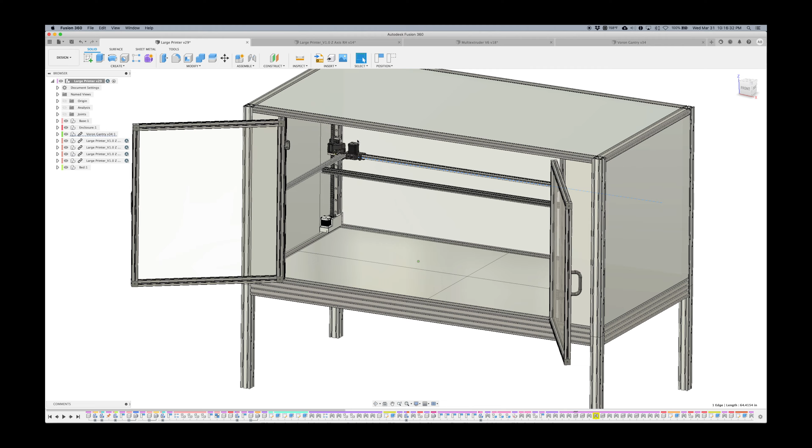So here's the entire machine, built out of 80/20. The doors are salvaged off of some industrial equipment.

The whole thing, these panels are all 1-inch high-density polystyrene foam, which is aluminum faced. You get it at Home Depot or Lowe's, the home improvement stores. And that's on the left and right side, the back, the top, and there'll be one underneath the bed as well to insulate the entire machine.

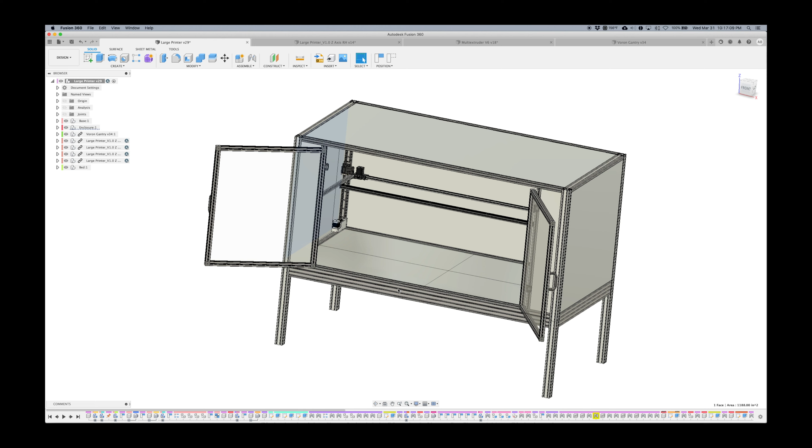So the bed is made up of 4 MIC-6 cast aluminum tool plates. They're 1/4 of an inch thick, and each section of the bed has 2 400 millimeter square silicone heating mats.

So I went with this design versus something different, such as a single mat or 2 larger mats, mostly for servicing the machine. If I have a mat die, like this one per se, I want to be able to just replace this panel.

So in theory, you could pull this 1 quadrant heater out, put a new one in, service this one offline, and keep it as a spare.

Whereas I had got prices for 900 millimeter square heaters, 2 of them, but the risk was just too high for me. If one failed, you could be down for weeks while waiting for another heater, plus you have to delaminate that heater from the bed, relaminate the new one, all kinds of trouble there. So this made the most sense in my mind.

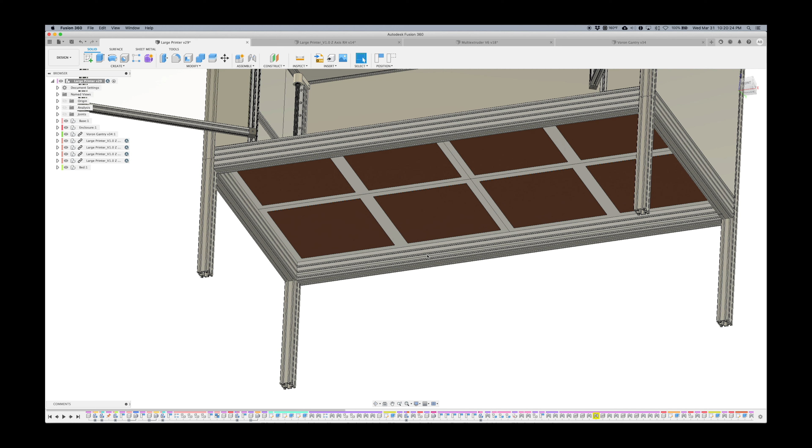So this will be insulated as well underneath the heaters, and not shown, there is 3 crossbars that are 2 inches square supporting the heaters, as well as some more supports on the edges supporting the edges of the plates.

So on top of the plate there is a 1/4 inch sheet of tempered glass. This was very reasonably priced in my opinion. I got a price of a little less than $200, custom cut, edges smooth, corners rounded, and brought into the local glass company, and then for a small fee they'll deliver this to my house, and I might be able to even get them to put it right in the machine.

But I figured for $20-30 to have them delivered to the house was a lot better than risking damaging the plate, transporting it in the pickup truck, since I don't have the equipment to transport glass like they do.

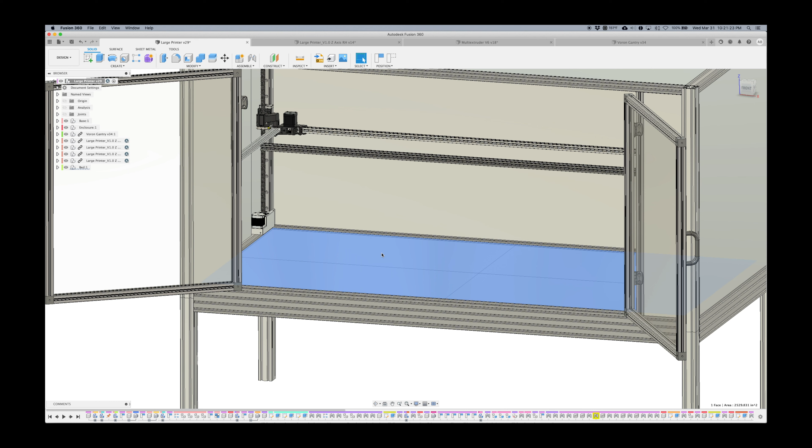So that's the structure of the bed. We'll move up from there now.

So the doors are polycarbonate, or Lexan. I have these, they're not going to be the most insulated. I will most likely look into adding a second layer of polycarbonate to create an airspace later on, so I don't stress the heaters too much.

I do have a 2400 watt resistive heater fan coil unit that I'll be using to heat the chamber. That'll also be modulated through a solid state relay.

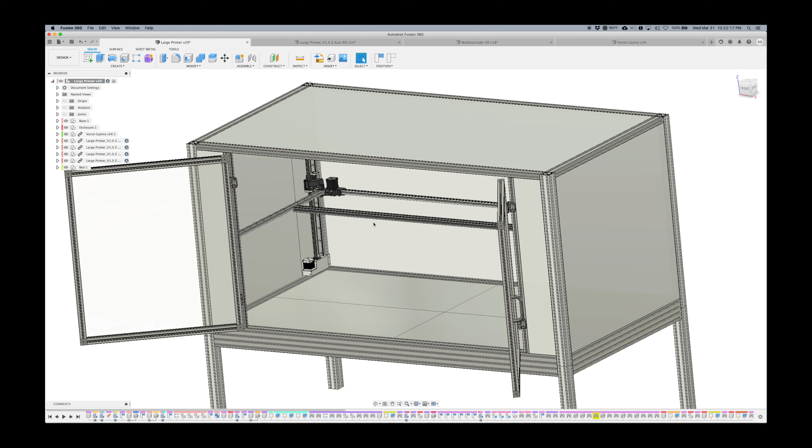So let's turn off the enclosure so you can see the workings of the machine. You'll notice I'm supporting it on 4 screws.

So these are 1605 ball screws. The price was right on these, that's why I went with these. I would have liked to go with 1604s, but I just could not get them. And I would have gone with 1204 ball screws, but also couldn't get them in the length I wanted.

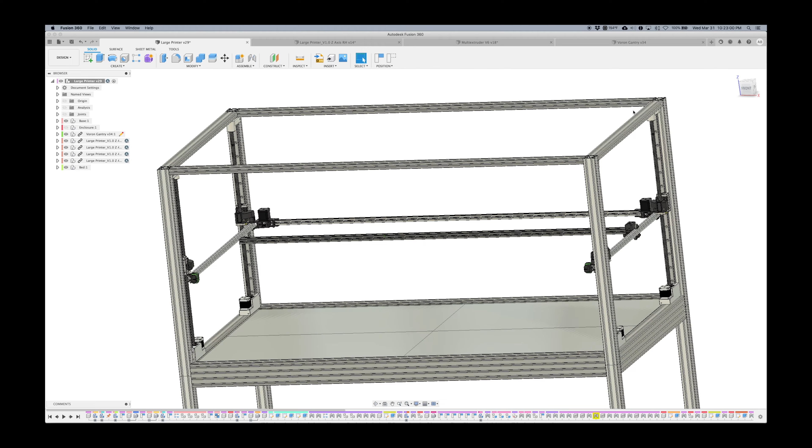So while I have the capability of machining all these parts custom, I didn't want to. I didn't want to waste all the time building a machine when I really just wanted a printer. So some compromises. There's a lot of concerns out there that these screws are not the straightest screw.

So I did some tests. I tested 2 out of the 4 screws that I bought. They all came at the same time from the same distributor. I put them on a known flat surface, and I checked them with an indicator with the ball nut at the center of the screw, and I was getting about 1.5 thousandths of run out on the center of the screw to the nut. So in my mind, that was good enough for me.

Like I said before, I'm not building a printer that is for crazy high accuracy. It is for putting down a lot of material in very large layer widths that shouldn't matter if the screw wobbles a few thousandths of an inch.

So there's a few things here that aren't drawn yet because I don't exactly know how they're going to work, and I'm going to have to figure them out on the fly. But for the most part, this is the printer. So 4 screws, we have stepper motors. We'll jump into the model for them.

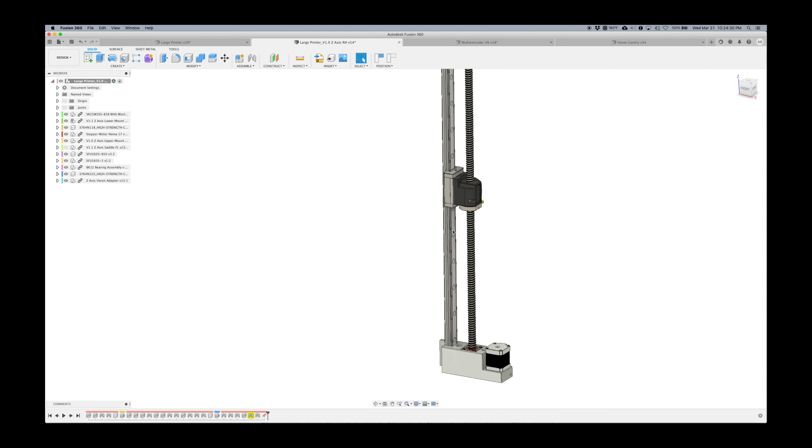So these are basically all the same. We have a 25 millimeter dual profile THK linear rail. This is something I've salvaged from some machinery over the years. I actually have 3 sections of rail. One of them is long enough to get 2 out of, and the other 2 are long enough to get 1 apiece out of. So these are cut at 33 inches roughly in length.

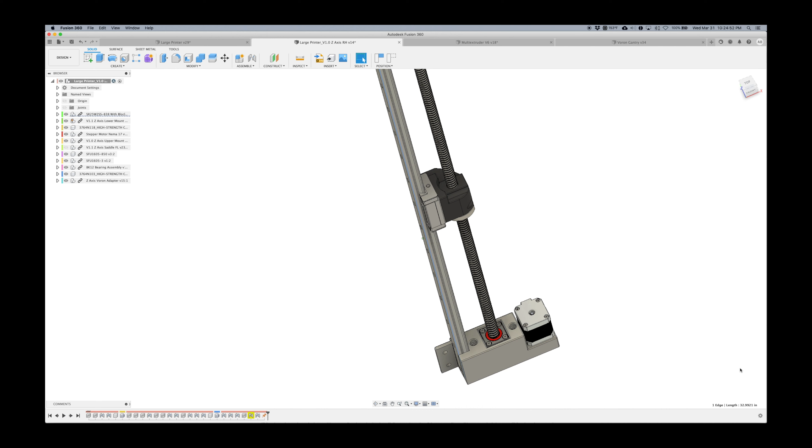And then I've designed these upper bearing supports in these lower brackets, and these reuse the bearings that come with the screws. So it was actually cheaper to buy the ball screws with the end bearings and just reuse the pieces out of it than it was to try to do something else.

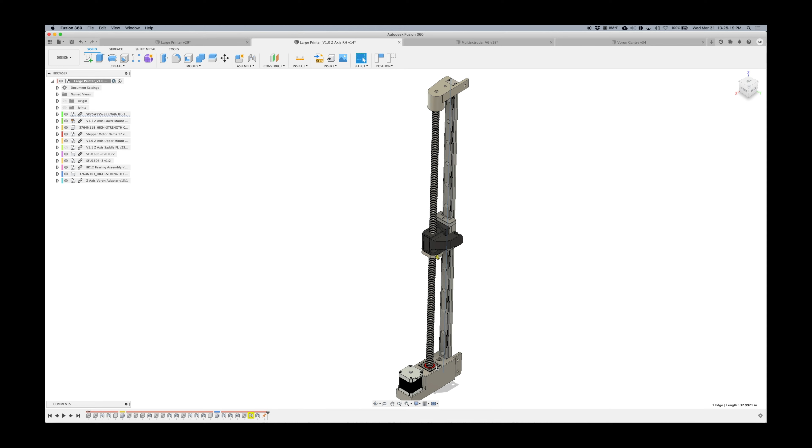So what we have is the angular contact bearings that are in a mount, and that just gets put into this housing, which is 3D printed for now, but if that's not sufficient, we'll move over to machining these. That was always the goal.

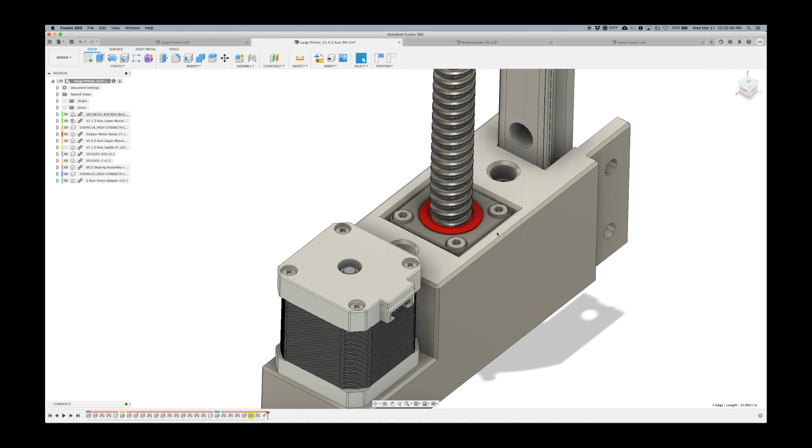And then the same with the upper mount, which just has the single bearing pressed into the mount. So these bolt onto the 80-20 extrusions. They have cutouts in them to locate the linear rails, so you don't have to worry about aligning those.

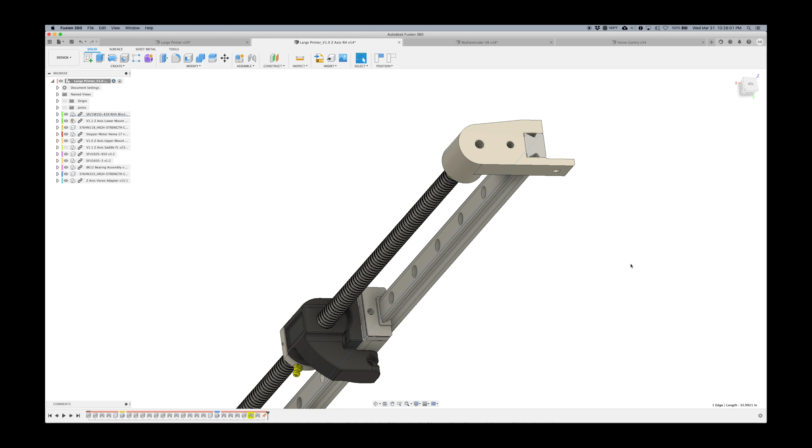They just bolt the bearing blocks to the machine, slip the rail down into the channel, slip the top bearing on, you slide onto the screw, slide onto the rail, drop a bolt in here, another bolt up through there. There we go.

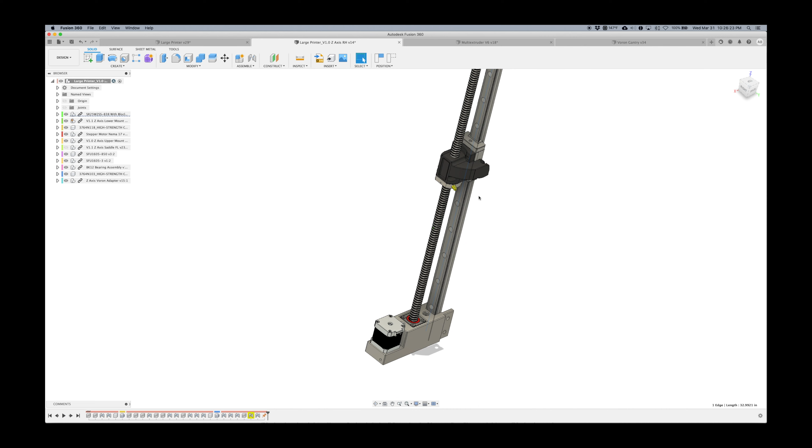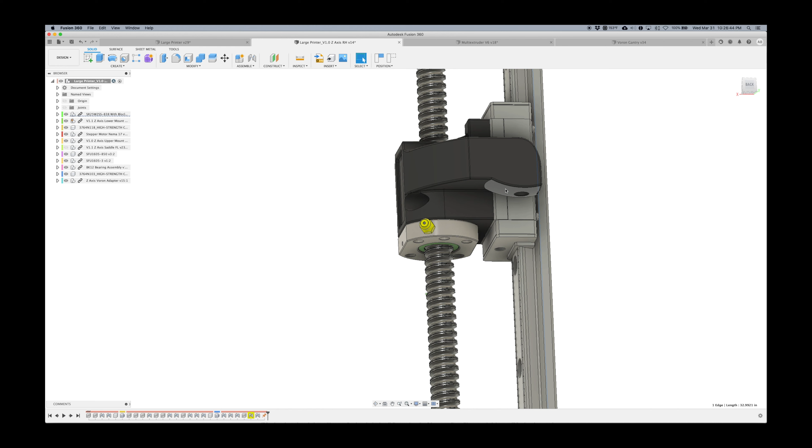So the ball screw attaches to the linear rail bearing using this mount that I designed. This is just a mix of this cool design, this spherical mount for the Voron, and I extended that out on this little arm to mount the screw. The screw lowers into the nut, and then that bolts to the bearing, making it all one assembly.

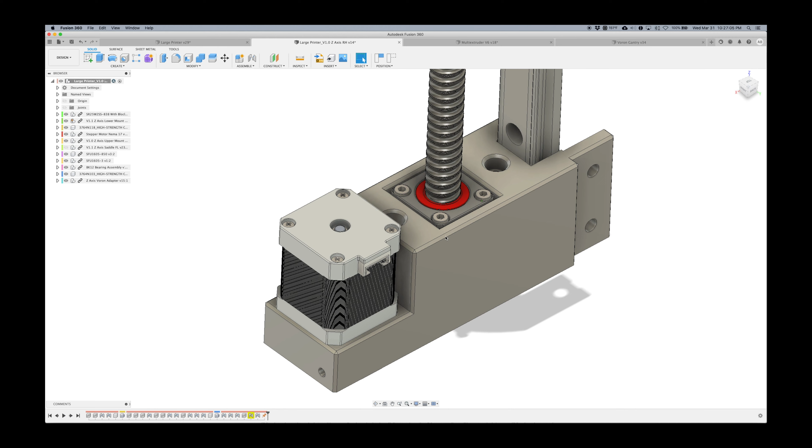So down here, we've got a NEMA 17 stepper motor, and that is coupled to the screw. We have a 16 tooth pulley, GT2 6mm wide timing pulley, to a 60 tooth GT2 pulley, and a little tensioning mechanism.

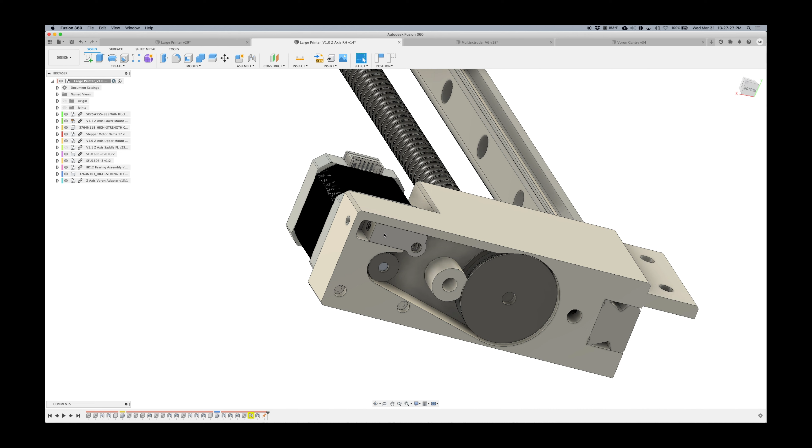Yep, we do have it. There's a bearing, or two bearings, and there's a little screw here, so you just adjust the screw to tension the belt. The belts are snug to begin with, but this is just to give it a little bit extra on it.

So we jump back to the main model. So we have 4 of those, 1 in each corner. There's a left hand and a right hand version. They're just mirrors of each other.

And those will form the Z-axis. So it is a rigid Z-axis. In theory, you could get some flex out of the gantry with this, but it wasn't primarily designed for that. The primary goal was mesh bed leveling, taking care of it.

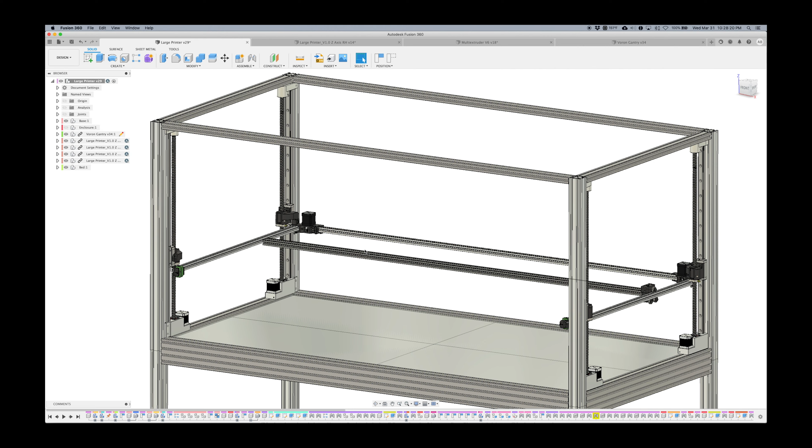The reason why I had looked into and designed, spent weeks designing, a kinematic mount system using 3 screws, one here, another one over here, and then a third one at the back. And it was a kinematic mount system, which would allow the entire gantry to go off of plane. But then I realized that if there's any deflection in the x-axis gantry beam, that can't compensate for that, and only mesh bed leveling can.

So I figured if we have to use mesh bed leveling to compensate for sag in the gantry, we might as well just use it for everything. So that's how I decided about the 4 rigid points.

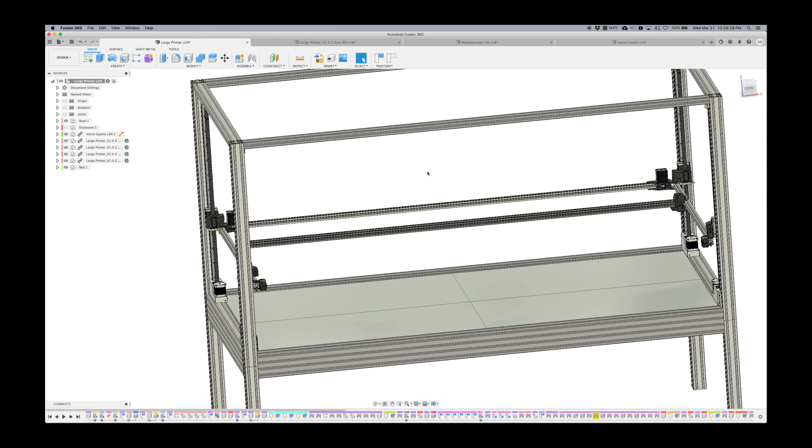The Voron design. I love the Voron printer, and I plan to build one eventually as a smaller printer. My printer I have currently is a phenomenal machine. It's my workhorse. I never have trouble with it. I load a part, I hit print, I get the part I wanted.

So I started with the Voron design mainly because it was already done. All of the geometry for the belts was laid out properly. None of that would have to be recalculated. So I just set about modifying for what I needed.

So this is what I came up with. The Voron is great for a high production, high quality, fast printer, but it's expensive to start. The Voron runs between $1,200 and $1,500 if you're careful to build one of the larger size ones. This is the Voron 2.4 specifically. I'm not terribly familiar with the other models, but that's all using linear rails.

The problem with a printer this size is we're over 1700 millimeters in X. Trying to get linear rails of that size is extremely difficult, so then you're looking at splicing rails. Not the greatest option — just not many good options to put linear rails of this size onto a printer this big. And I didn't want to spend half as much on three linear rails as I did on the entire printer.

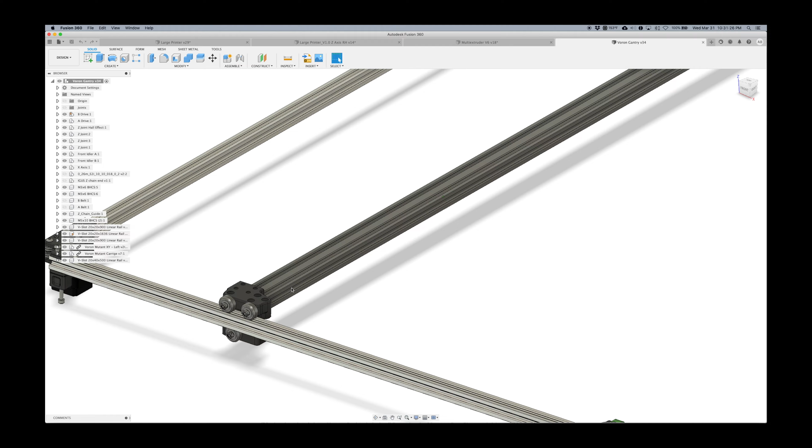So, with the whole resolution and quality in mind, I decided to go with this. Just like your run-of-the-mill extrusion-based V-rail printer, I used V-rollers.

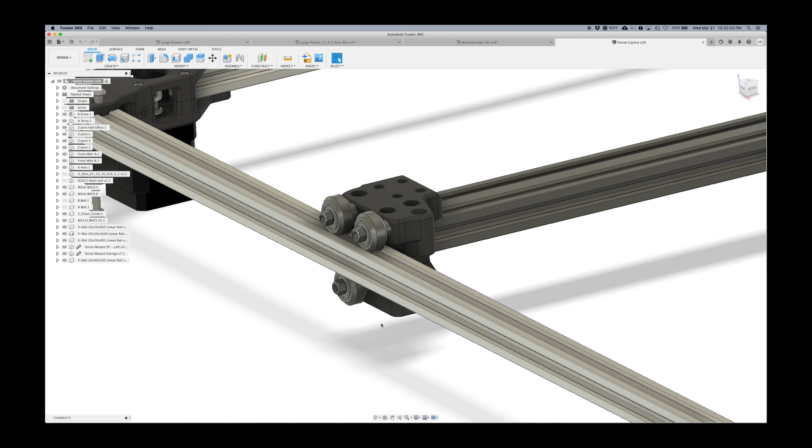This is a hybrid — if you notice the name — of the Voron 2.4 carriage, sorry, not rail, carriage, as well as the Voron Trident carriage. They are very similar; all the holes line up, the idlers line up.

So I took those and modified them to work with V rollers and a larger beam for the cross beam.

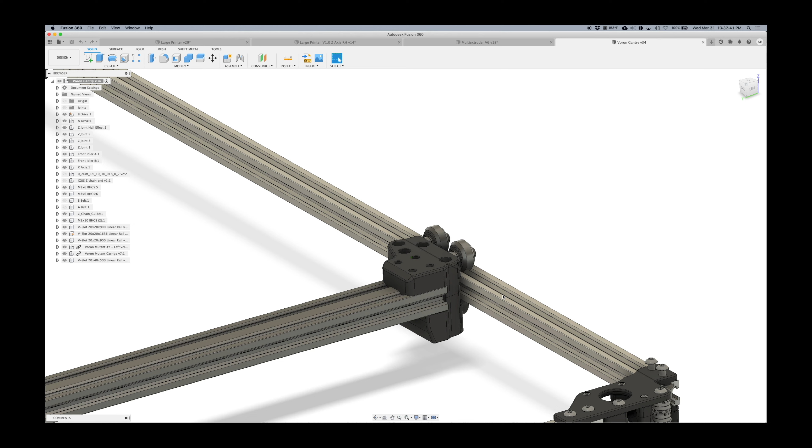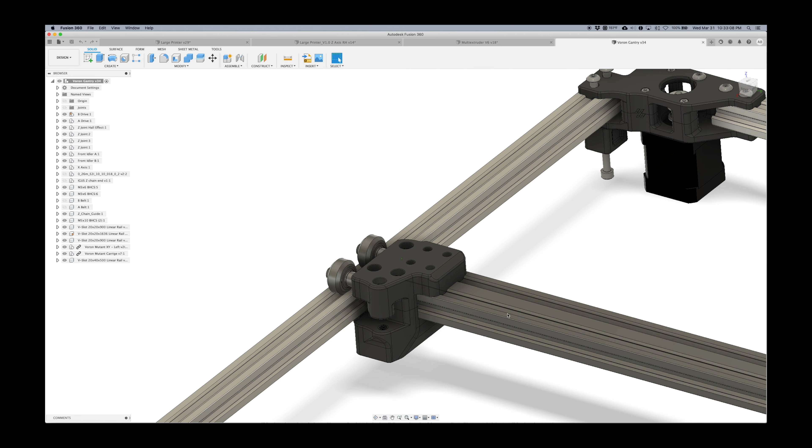So this stuff is all metric. This is 2020 V-rail, similar to OpenBuilds. The cross beam drawn here is 2040. However, I'll actually be going with 2020 V-rail for the rolling rail, and then a 2040 in a vertical orientation bolted to the 2020 — I need to redraw that — and that'll give me vertical stiffness for deflection, with the 2020 as my actual rolling structure.

So with this, I can replace these rollers hundreds of times as they wear without worrying about the cost of putting linear rails on a machine this size.

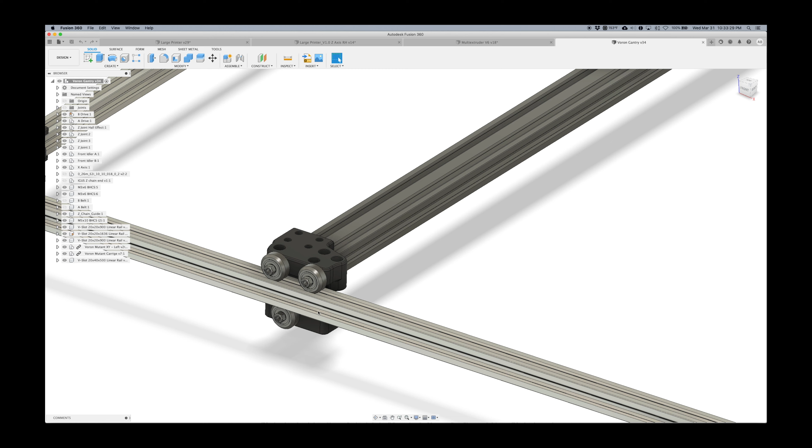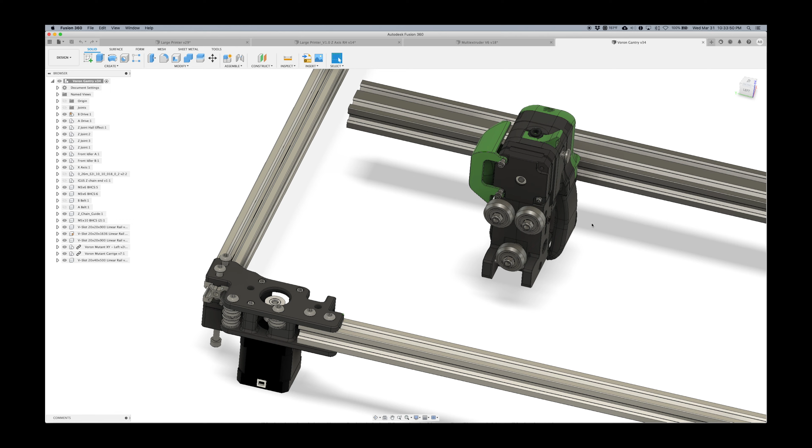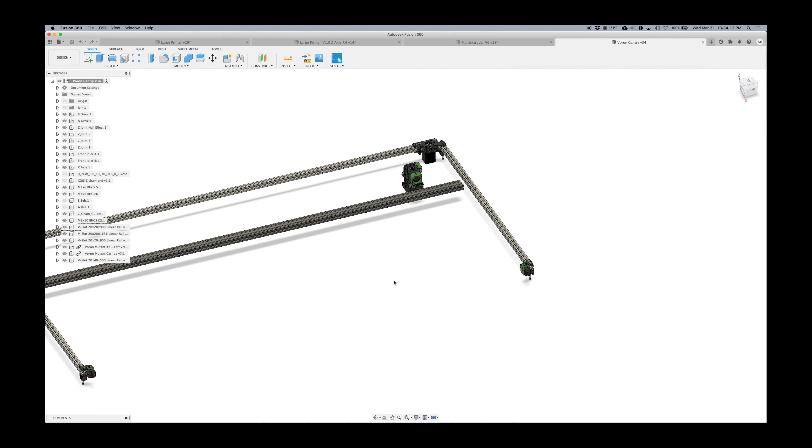Right now this just has the Voron Afterburner extruder drawn on it; I haven't drawn the Titan yet. So even if I replace these every print, you're not talking more than $10, when we're talking hundreds of dollars of filament per print. So the cost makes sense — the wheels are a consumable in my mind.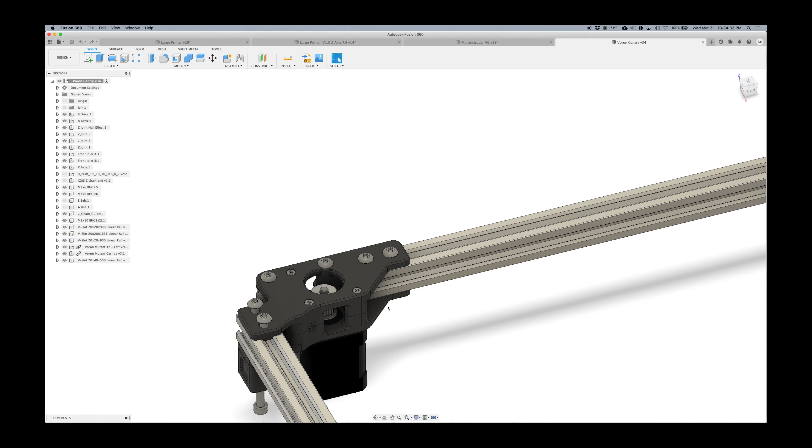In this design I've removed a lot of the holes on the drives just for strength, and I'm still in the process of updating the other drive. I don't know, is this the B? This is the A drive — I still have to finish updating it because in my testing, this corner structure is kind of weak.

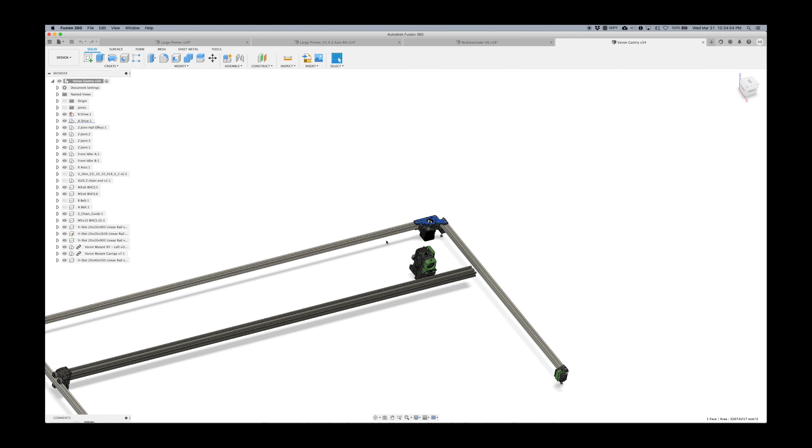This is still using the 6mm belts. Like I said, I'm trying this as cheap as possible, and we'll upgrade from there. So the first idea of upgrade is bigger belts — right now this will have 6mm belts on it.

We can upgrade to 10mm belts — it's just printing some new parts, using the same rails, and going with bigger belts. There'll also be some belt supports in thirds, roughly one here and another one roughly over here, which will help with the belts whipping as they traverse back and forth.

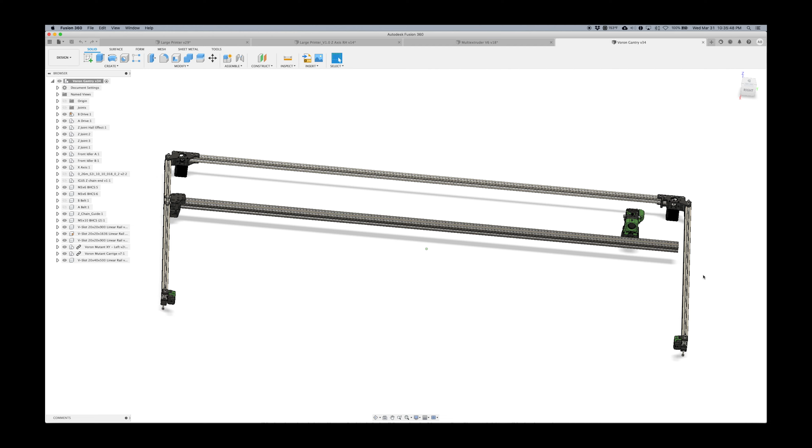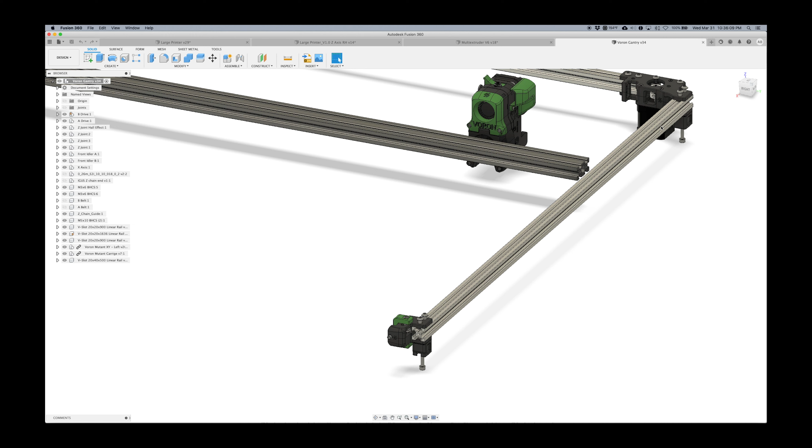Some of the other stuff not shown: there'll be a plate bolted to the outside edge of the y-axis rails. I'm not sure if that'll be steel or aluminum, but it'll be bolted to the rail just to provide additional vertical support like a spine, without impeding the V-rails for the rollers — so that this can span this distance, roughly 900 millimeters, without sagging under the weight of the x-axis gantry.

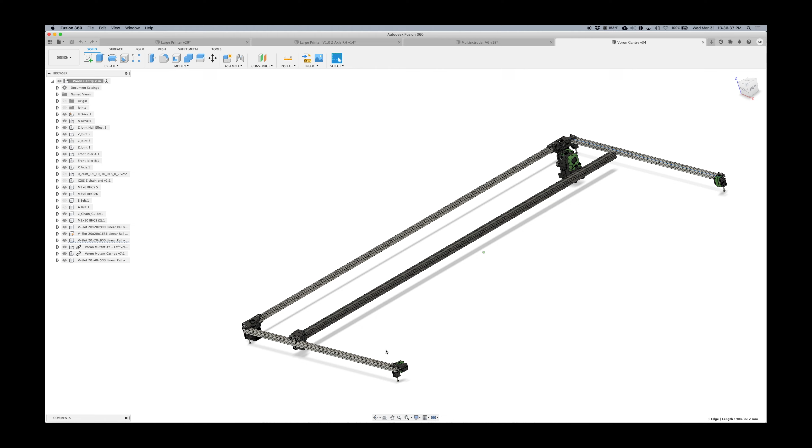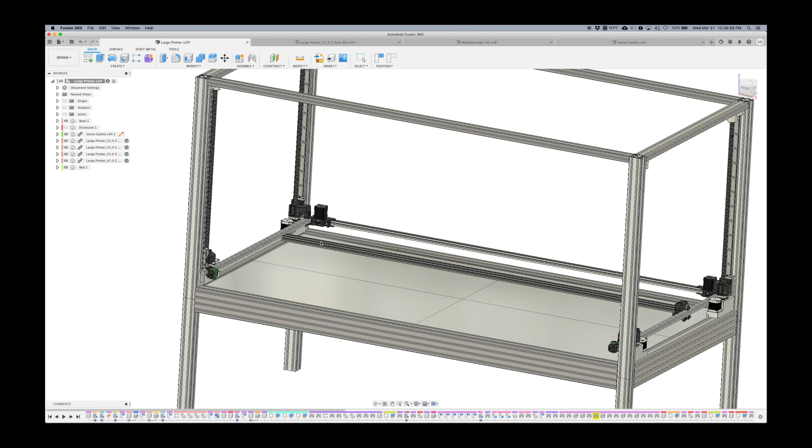As this is drawn, this is upside down — it actually goes in the printer like this, which you may have noticed in the main printer drawing. That's so that the stepper motors can clear the bed. So when this thing is all the way down, like that, without the stepper motors being on the top side, we can't get the head close enough to the bed.

This most likely won't be an issue with the Super Volcano, but if I wanted to put a secondary or tertiary tool head with something like a V6, so I can do high resolution printing with a 0.4 nozzle instead of a 1.0 nozzle, I need to be able to get it close enough to the bed to actually do that. So that's the plan for that.

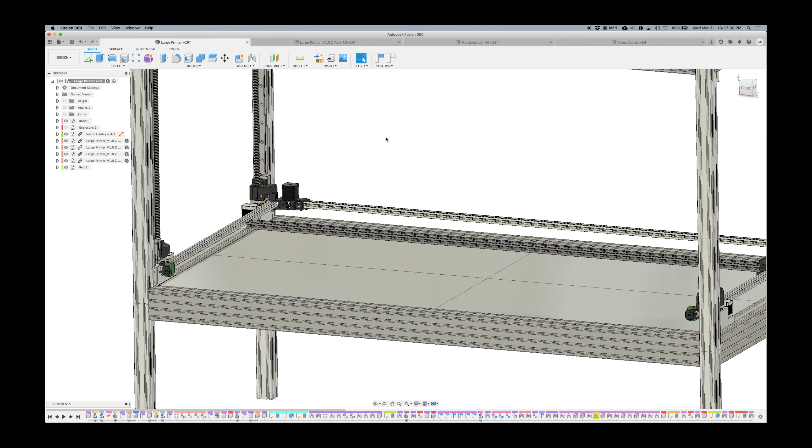So that's roughly the plan of the printer. Now, a couple of the other small details: feeding a printer like this.

This printer is going to go through many kilograms of plastic per print, so we have to have a continuous feeding mechanism. While you can get rolls of filament that are 3, 4, 5, even up to 10 kilograms of plastic, that stuff is very common in PLA and PETG — it's getting there, but not as much in ABS and ASA, which is what I'm looking to print.